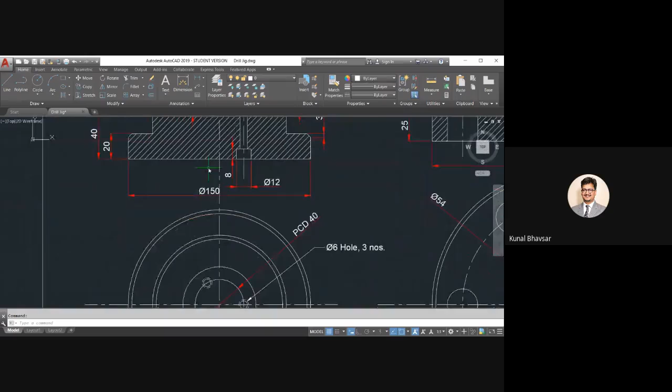Also, in order to hold the stem into its own position, so that it doesn't rotate about its axis, we have these three holes of dia 6. And obviously it has a cap of dia 12 by 8 thickness - that particular dia 12 is the bore which is provided for the hole, so that the screw head can go inside directly.

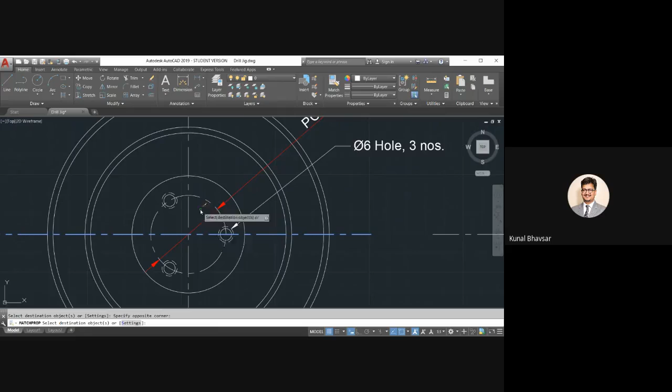So yeah, three holes are provided which are 120-degree apart, and it is at what you can see, PCD of diameter 40 here, which is lying on the diameter 40.

So yeah. Next is the stem. So on this base plate comes the stem, and the stem sets on the base plate, and you can see the MS1 number. Again these are dia 6 holes, 3 number, PCD 40 same, so it is matching there.

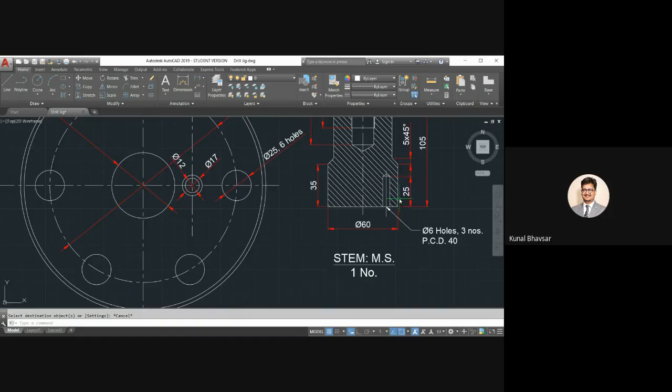Okay, from here to there these holes are going to match. So when you see from top in the section view, you actually can see only this one, whereas the other two are not on the same plane. So hence that is why we have not shown here.

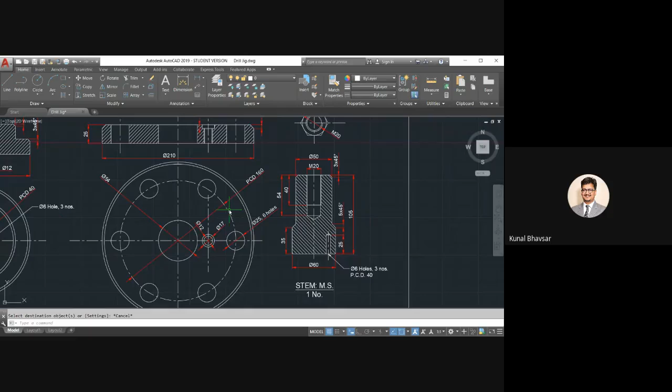Okay, similarly it will be there, the orientation of this stem. So the stem will actually support the whole jig plate and the component. Basically your component which is to be drilled will be sandwiched between the base plate and the jig plate - so this is the jig plate. And then the component also requires support, so this stem will provide that support.

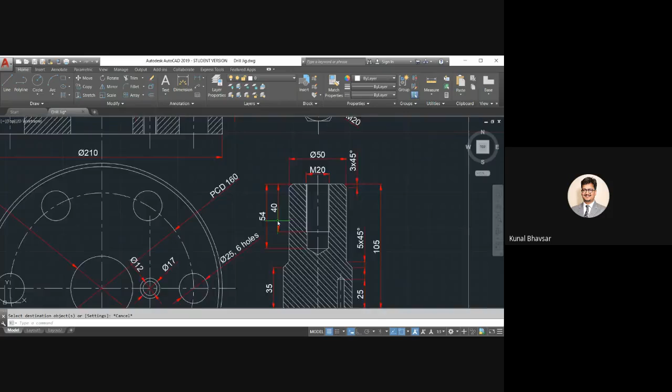Apart from that, the stem also has a drilled hole of M20. The drilled threaded length is 40, whereas the drilled hole size is 54 - we have kept it longer. So yeah, when the stem goes in, then goes the jig plate, and the jig plate has a sub-assembly of a small bush here.

If you see a small bush - it's alloy steel, 6 numbers of this bush, this is called a jig bush also. Obviously these bushes are required so that whatever your drill bit is there, whenever it's passing through this hole, they are the guidance or guidelines for the drill bits.

And if at all there is any wear and tear, the wear and tear will happen for the bush and not for the jig plate, which will save time and money in the production. So yeah, the bush goes inside, six numbers of the bush are there. So you can see six numbers of dia 25 holes are there, and you can see the OD of the bush is dia 25.

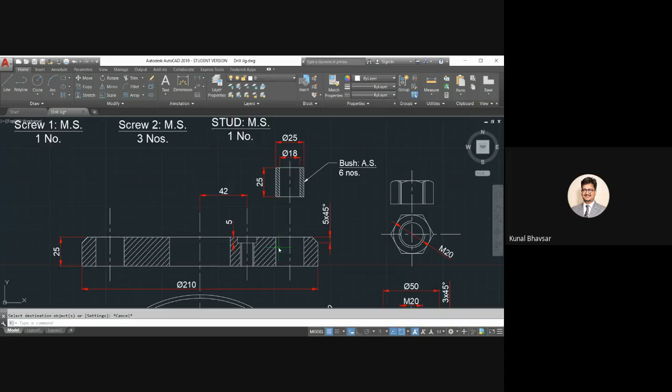ID is dia 18. We will see what goes inside this bush later - basically it is the drill bit that goes inside the bush. The bush will assemble here in the jig plate, you can see 25, 25. So from both the sides, the faces should flush with each other. Apart from that, the jig plate also has one counter bore and a threaded hole, basically with a counter bore.

So threaded hole of diameter M12 and has a bore of dia 17 of 5 thickness.

Now what is this 5 thickness for? This thickness is for the 18 - this total screw will actually go first inside the latch washer, that is 13 mm thickness plus 5 mm. So this screw will come here and set, and this is also M12, this is also M12 hole. In between this screw and this jig plate comes the latch washer.

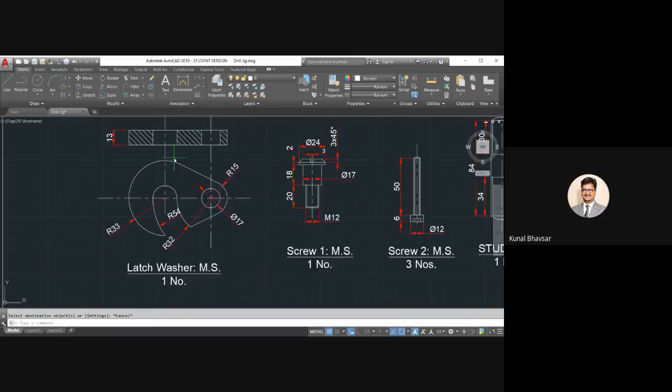Now this latch washer is a special type of washer, which is distinguished from our plain washer, which is round.

Basically, when we have very frequent opening of this in a jig, once it is all drilled, we have to open the jig plate, remove the component, then again put the component, put the jig plate, tighten it, and then drill all the six holes - that is the operation.

In order to do this, every time we have to remove the nut, and after the nut we have to remove the washer also, which sits below the nut. So if the washer gets lost, if you misplace it when you remove the nut and washer, that will be a loss of time.

So in order to save time here, what we have done is we have used a latch washer. A latch washer is basically a locked washer - you can see it's just like a latch. It is hinged at this hole here.

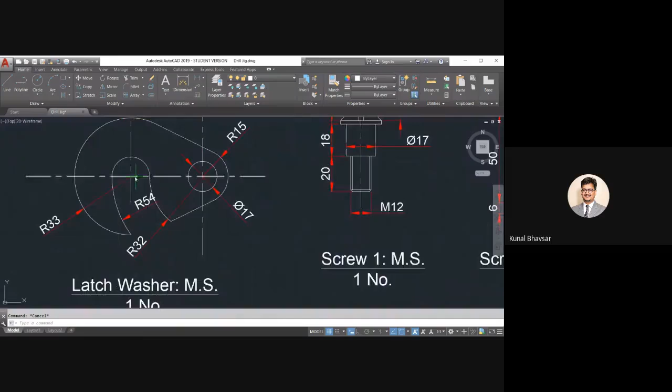You can see dia 17 hole. It will be hinged at this particular screw of dia 17 here, and hence it will lock this dia - this is a dia 22 slot. A dia 22 slot will actually lock with the dia 20 slot of the stud.

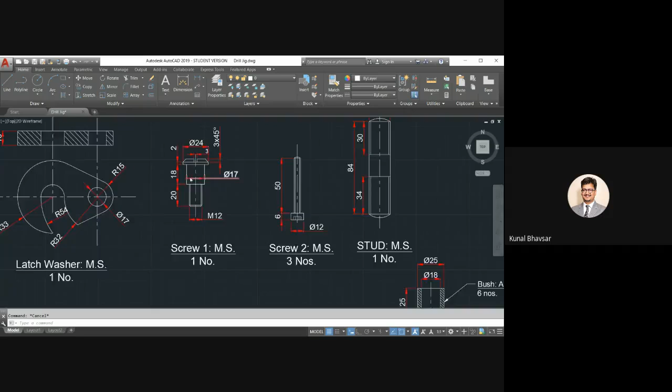We will see the 3D view also, but let us understand all the parts first. We have a screw, screw 1 - that's 1 number - then screw 2, 3 numbers. So obviously the 1 number which is required here goes in the jig plate and the latch washer.

The 3 screws which are required here are of dia 12 and 6 mm thickness, with a 50 mm length - this goes inside here. So 25 mm here, and you have almost 40 mm here, that much - 40 minus 5 is 35, plus 10 mm. We have kept the clearance here because this is 50 mm.

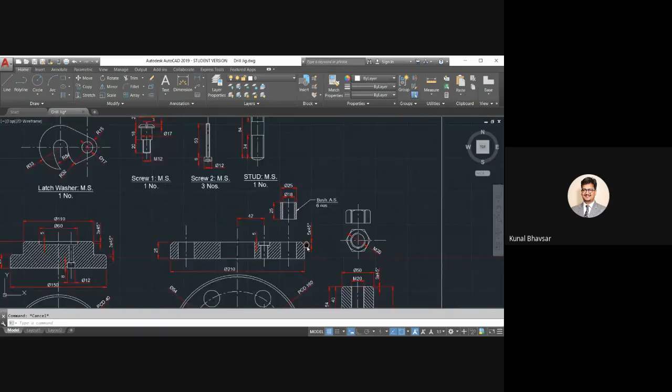After this, you can see a stud of M20, basically diameter 20 nominal, and from one end it is threaded at 30, and from the other end it is threaded at 34. So obviously the 34 end will go inside the jig plate and the other things here, and through the jig plate it will also go inside the stem.

And then from top, the latch washer and the nut will come, and it will tighten it up. So this is the details which are given here. We will come to the drawing, assembling these parts later.

Drawing of these parts is very simple. I will go through some of the difficult parts which are there later. But before that, we will see the 3D view which is created, and that will give you a clear picture of this particular assembly.

So if you can see here, the complete view of this assembly is given. So this is the base plate, and this is the jig plate here.

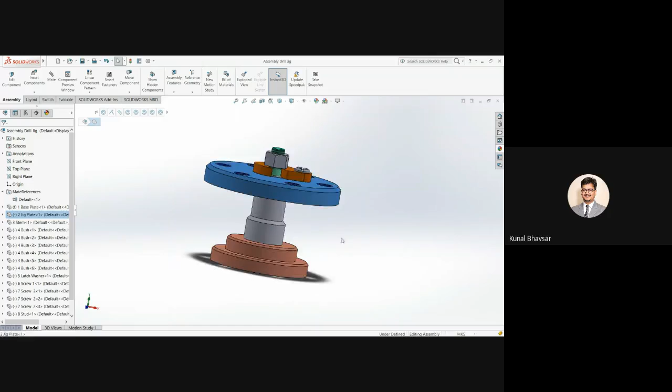So in between this base plate and the jig plate, your stem height is so adjusted that it matches the component height. The component which is to have six number of drills in between here - it will have that much same amount of height, so it will be sandwiched. The component will be there, and you will not be able to see the stem.

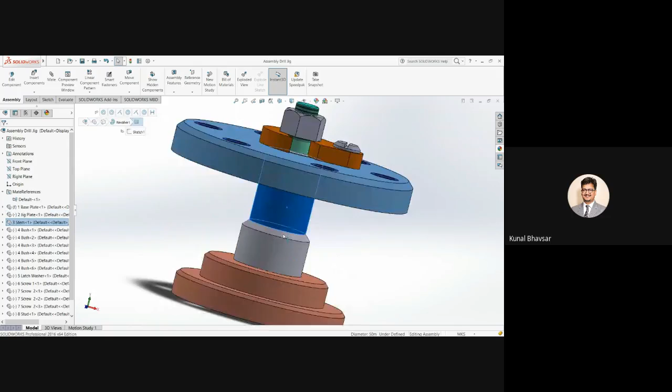There will be a component in between the jig plate and the base plate. This is the stem, and this is the latch washer which we already talked about. This is the nut going on the top of it, and this stud running through the stem, the latch washer, and the nut. We will see the section view of this.

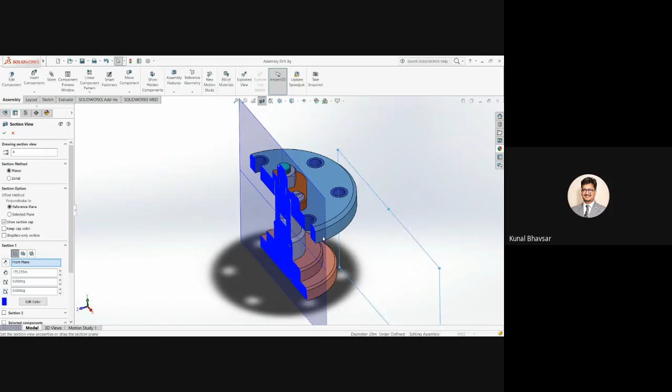We'll see the section view. So in the section view, what we are doing is, you can see here the small jig bushes which are already placed inside the jig plate. They are a different part.

Whenever the jig plate is asked to be drawn, the jig plate only has a dia 25 hole, that's it. This jig bush is separately installed in the jig plate. So you can see the base plate here.

The stem and the base plate have a threaded part here, so it is fixed with respect to this screw. Then we have a stud going inside this stem hole of M20, and the latch washer comes in, and then the nut is tightened from the top to tighten the assembly. This screw is a special hinge screw, basically utilized for hinging this particular latch washer.

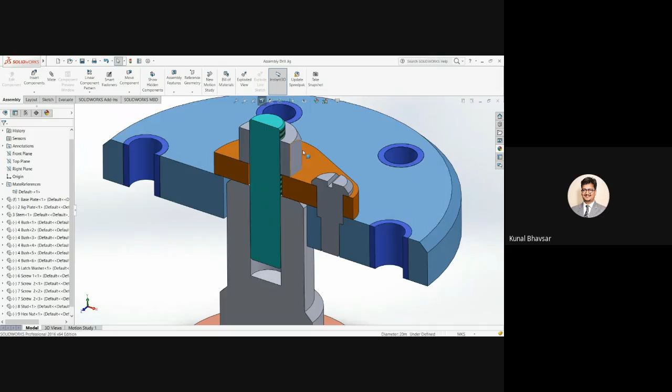So whenever you want to open this assembly, what we'll do is open the nut, and then we can just pull this latch washer from here to here, that's it. We don't need to open this screw every time. We can completely remove this jig plate, remove this stud, and remove the component easily.

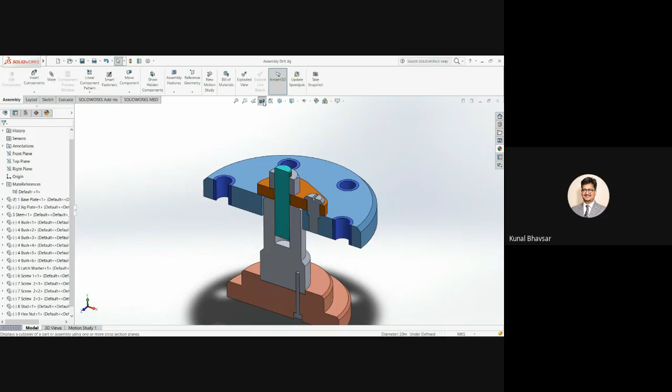Let us see if we can give some exploded view of this and show that.

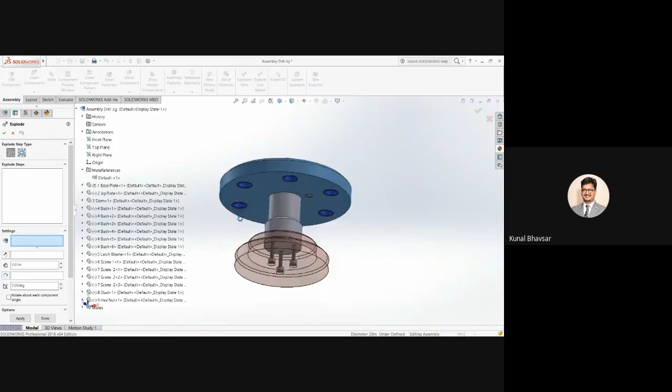Before that, I will also show you the base plate. I can show you that in the base plate, I am just changing the transparency, and there are three holes, and three screws at the base, which is tightened to the stem. So even for the stem, if I change the transparency, you can see here.

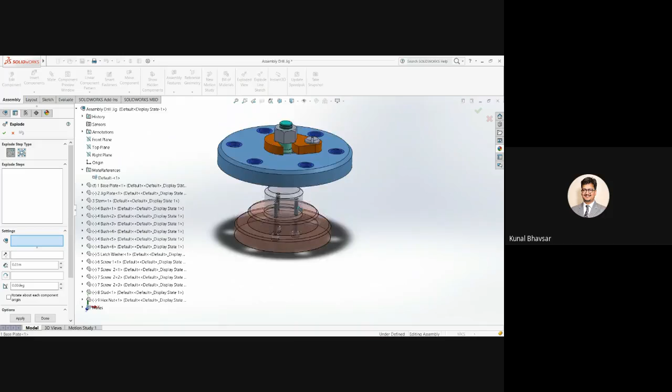Changing back the transparency now. Let the transparency be there. We can still remove this. So I will remove the nut.

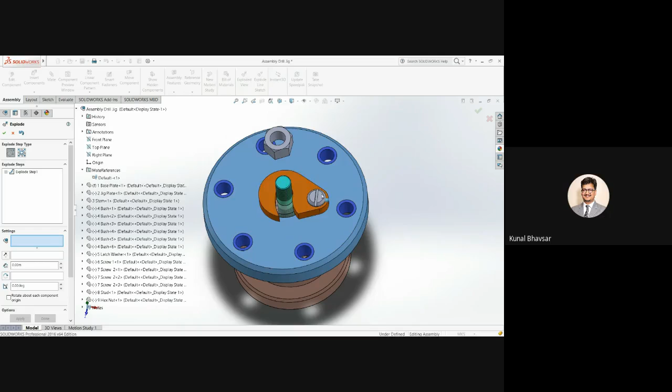Then I should remove, and the latch washer should actually be rotated. You can see here, not like this. Delete this step. Actually, this latch washer should be hinged here.

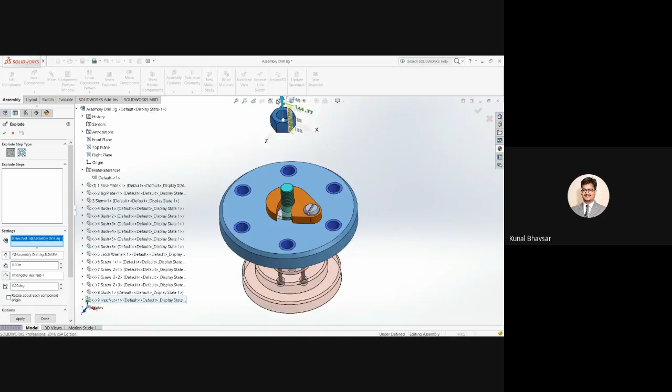No problem, let me just see this exploded view. Basically, this comes out here, and then we have this latch washer going out, hinged at this particular screw here, and then the whole jig plate comes out.

And the jig plate comes out. Actually it comes out with the washer itself. So let me change that step again. So it is this one, two, four, five, six, seven.

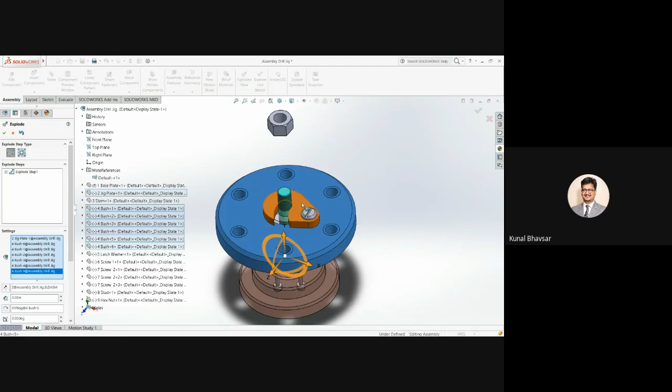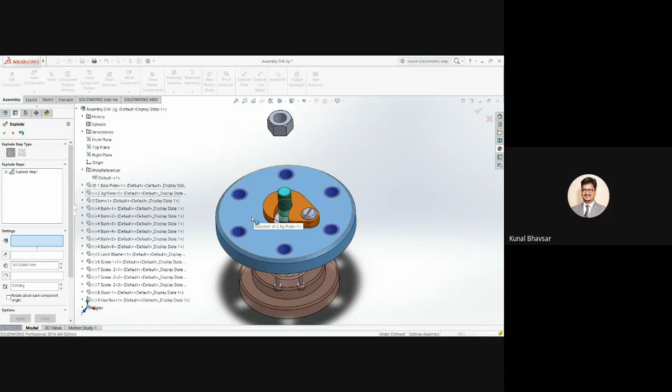So this includes actually. Let me do that again: one, two, four, five, six, seven, eight.

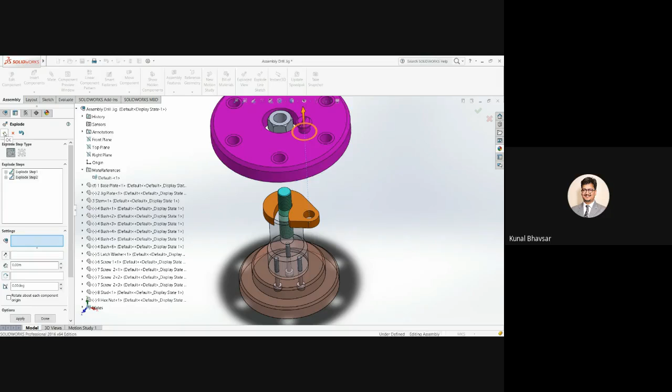So this actually just goes outside and it comes with the jig plate itself, and then comes out, and your component will come out easily, and then this goes again inside.

Now again we will go back to our drawing, and we will make the assembly drawing of the drill jig. This will also give us a clear picture of how this particular drill jig has to be assembled. First of all, making these parts, I think it's not very complicated.

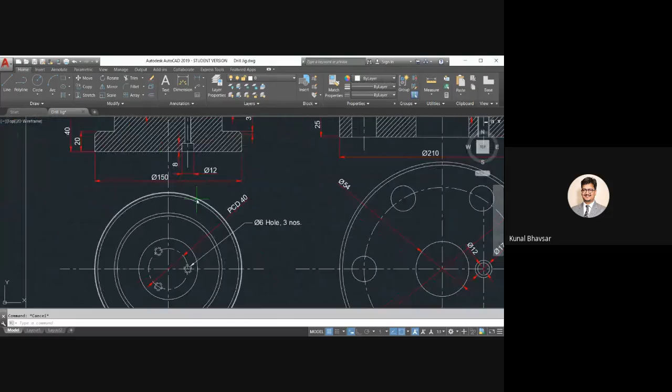It's very simple. These dimensions you can clearly see: 3 by 45, 3 by 45. These are the chamfers which I've used. There's a 5 by 45 also in certain parts. These are actually the two lines of the chamfer only. Again here, okay.

So let's copy everything so that I don't... from these parts, I will make the drawing. So basically, given is the detail.

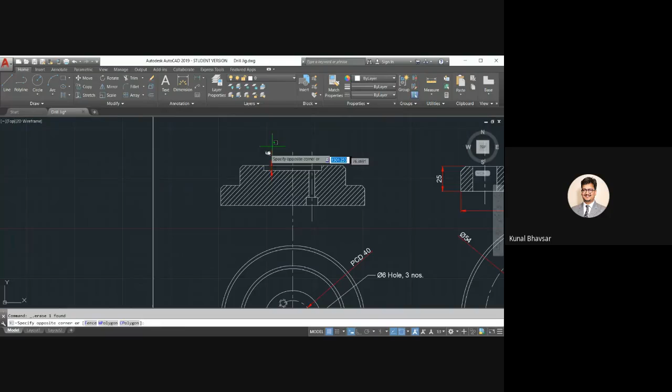The question will be: given is the details of the drill jig, and what you have to draw is basically a sectional front view of the assembly of the drill jig. Sectional front view of the assembly of the drill jig. Okay, first of all,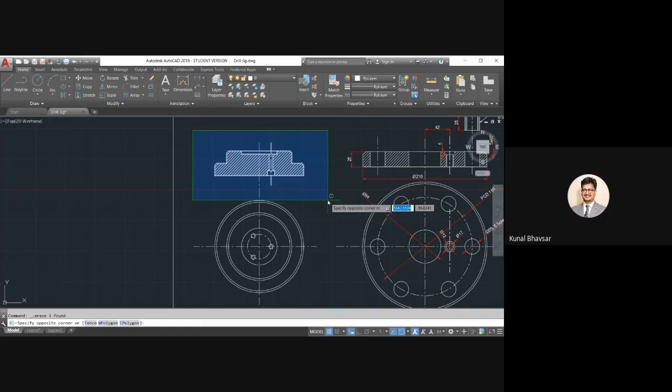we will start with the sectional front view of this. Sectional front view and top view. I will show the top view also. So first we'll start with this. So again, copy at a separate location so that I can make it.

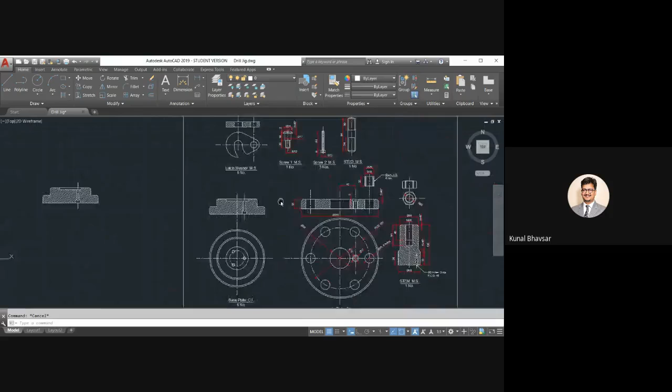Then on this, as we saw, we needed a stem to come in. So I will take the stem from here.

Okay, I'll just delete all the dimensions which I don't need right now, and then I can recreate them. So stem, obviously I will copy it from this base point here at the center point, and I will leave it at this point here.

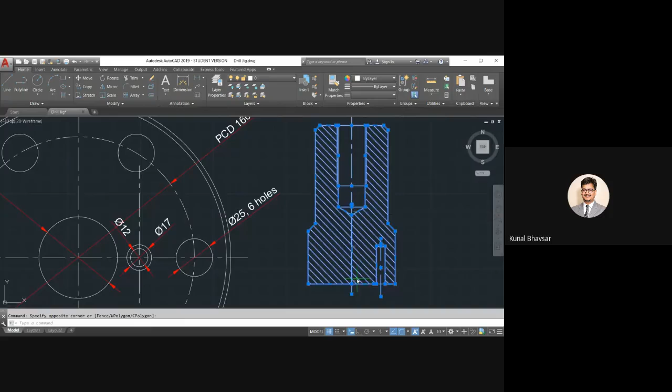Okay, I forgot to actually copy this, so we can take that. And now we can place the stem. Take this and you can place it here.

Okay, so obviously when the stem comes in, this line here is going to terminate up to this only. Since it was mirrored, these are two separate lines, and it's okay here. Now, yeah, this line is basically continuing. But here this line, this central line here, it is at the base point of both.

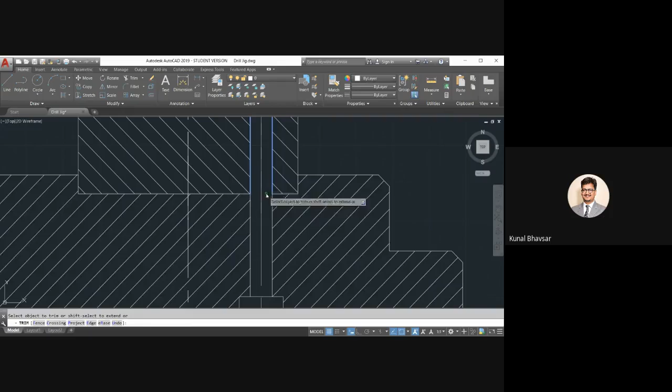Okay, I have created this space here so that this screw is going to come in. So I can put the screw here. Please be very careful that this screw is upside down, right? Okay, and screw is upside down here.

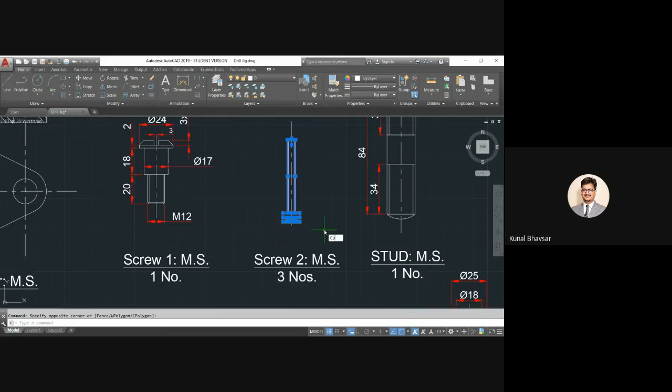Copy this. I will copy the screw actually from here. Okay, and place it here. Okay, if you can see this.

Okay, clearly done. This is a threaded screw. And the hole, because the thickness of the bore is 8 mm, whereas the thickness of the head of the screw is 6 mm. So obviously we have to keep this clearance in any of the part.

Okay, next thing that is going to come here, the other two screws are not going to fall in this particular plane, but if it is given that complete front view you have to draw, then you have to mark that circle, and then center, and then copy that particular screw. One screw only you have to copy, because the other screw will be exactly behind this. So one screw you can copy and keep there if it is full front view.

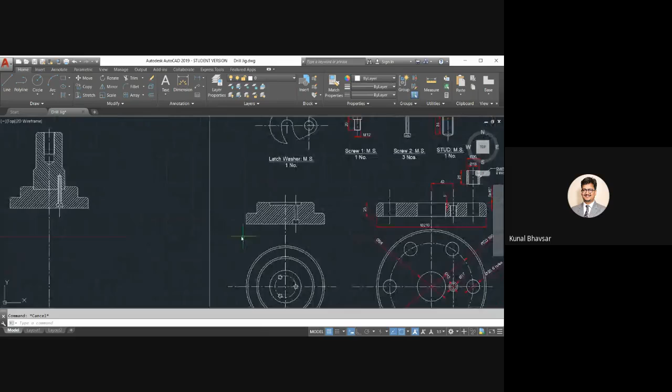Okay, now here it is sectional front view, so let's assemble the other parts. So here now we will put the jig plate. Okay, we'll put the jig plate.

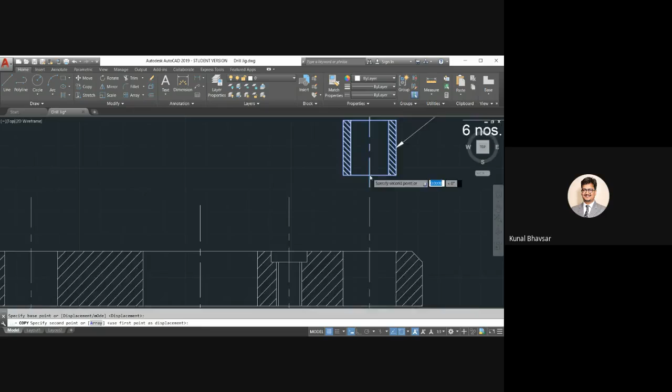In this jig plate, first we have to also put the bush. I will put the bush inside. Okay, I'll copy this from here to here, and I will also copy this side.

On this plane you can see, if this is the cutting plane, the two holes are there, so you can show the two bushes. Okay, and this two bush will go.

Copy this part completely, and what I'll do is I will have to take from the top. Okay, from the top of the jig plate, and put this on the top of this particular ear. Okay, top of the stem.

Okay, why? Because the latch is going to come into picture. Okay, so exactly this much height is the height of the component which is going to be there in between the base plate and the jig plate.

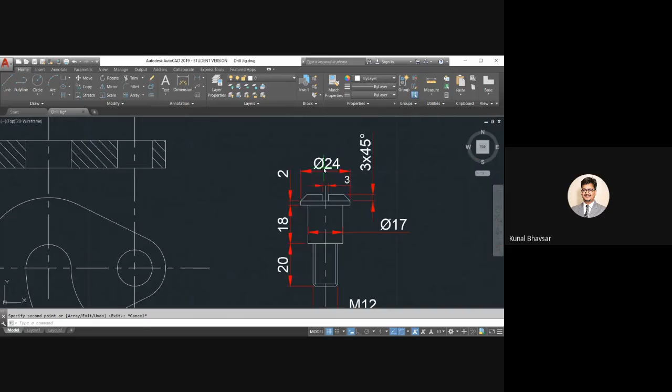Okay, now next you have to have the screw here. Okay, you get the screw here. Copy. Obviously I will copy it from here. Okay, sorry, not this.

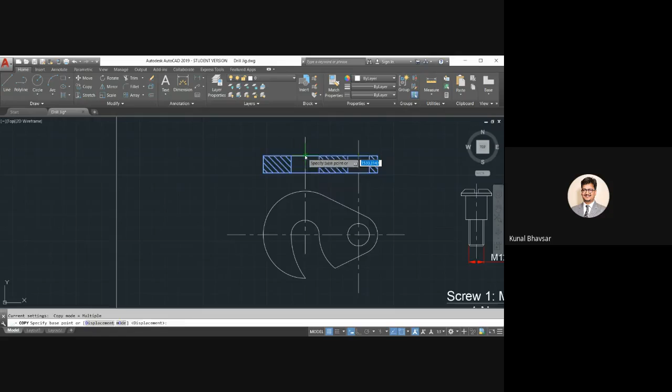Okay, before screw I need to put a latch washer, and you can take from either this or this. So if I am taking from here, I have to put it properly at this position here. Okay, but I have to take the bottom edge. So copy it from here and give it here.

Okay, so you can see this will completely align here. And once this is aligned, there will be a screw that is going to come in. So hence, this edge is going to get trimmed out. Okay, now you can put the screw in.

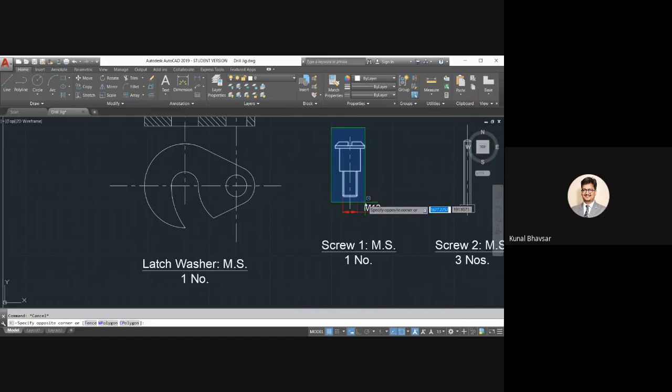So where are you going to put that screw in? Okay, only this much portion, only this head is going to be there outside the latch washer. Rest everything goes inside. Okay, so you can see here, take this and leave it here. Okay, got it?

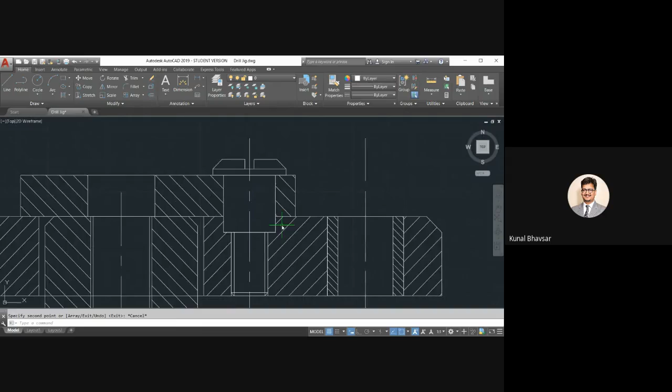Okay, so again we are not hatching the screws, we are not hatching the studs also, we will not hatch this particular long screw also. Okay, so obviously the stud is going to come in between, and hence we are not going to, here to here. Okay, completely these edges are going to get trimmed out.

Okay, if you see this also, basically that will be overlapped by, the line will also be overlapped, and also this you can maintain if you require it.

Now we will take the stud, and what we are going to do is take the stud here, copy this stud. Okay, I know that this stud will be aligned, but how much inside this stud has to go, that is the question mark.

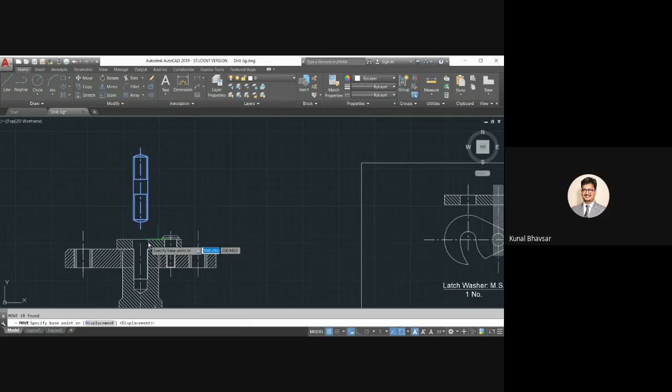Okay, how much inside this stud has to go. Okay, so once I get this aligned, move it, I will control it from here, and I will straight away move this here. Okay, nothing is going to go beyond this because this is obviously 20 thickness, right?

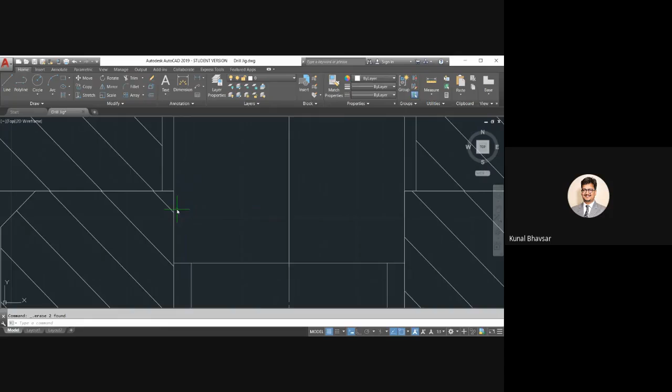So again, as I told you, these edges are going to get deleted because the stud is going to come in between. Next, we have to delete this also, and trim this line. This is the square neck only that is going to be visible.

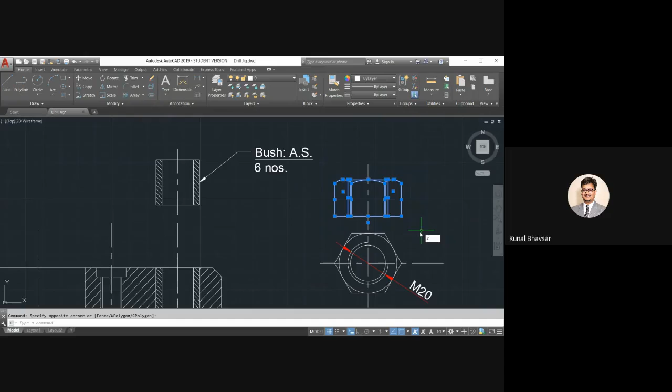Next we have to put the nut. This is an M20 nut, you can replace the size here with any existing nut, and the nut will come and sit here. There will be no gap between the latch washer and the nut because we are going to tighten it up. If you want, from here to here you can either delete the threading or keep the threading as well.

Here you go. And once the nut comes, that is also going to overlap the neck region of the stud. So this is the complete assembly, the complete front view of the assembly.

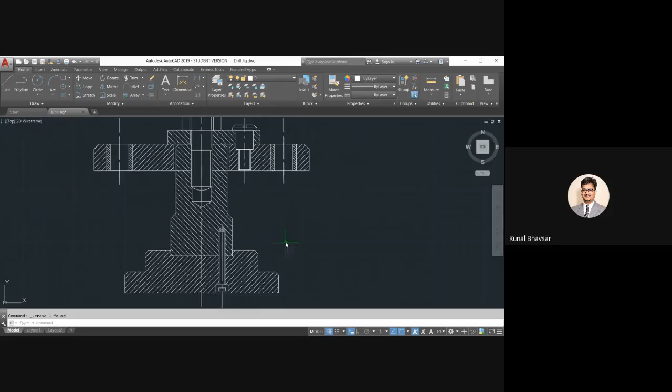If you want, you can give different colors for different hatching. You can see they are all staggered, so if this is 0 degree, this is 90 degree, and if this is 90 degree, then this should be 0 degree. Again, when I say this should be trimmed, once you make the hatch you will be able to know where the lines need to be trimmed properly.

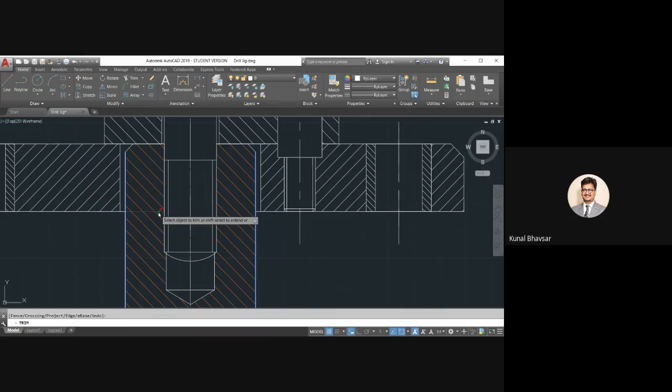Now you can see here, none of the lines are there, no problem, and you can change the color. You can retain this bush as it is. Now this latch washer is also a latch washer, you can hatch it into a separate color.

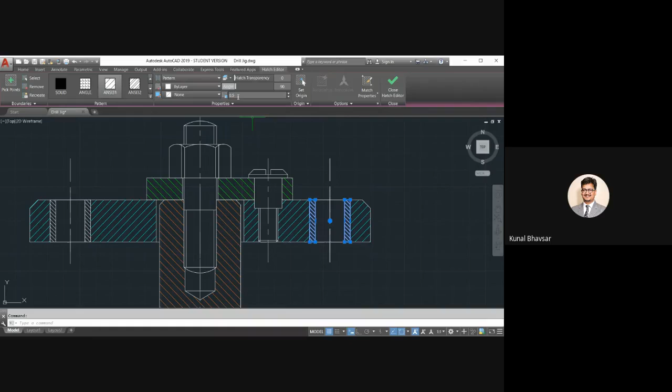Because here if this is 90, then this is 0, then again you need to have something different here. I've just reduced the size and changed the angle, reduced the scaling here, you can see 0.5.

So this is your complete sectional front view of the drill jig. If you want to make the top view, it's very simple, just have to copy this first base plate. We will go from the top first, so we have to make the circle.

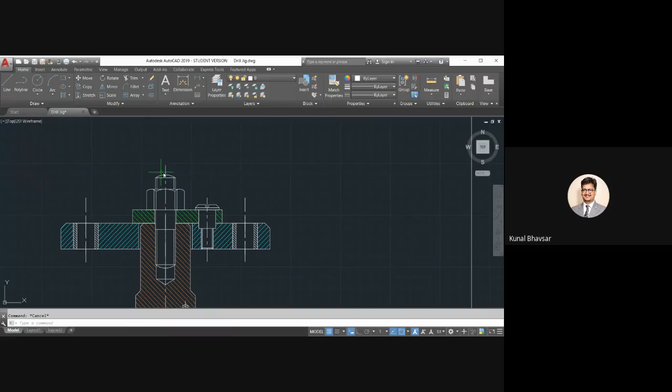First we will make the circle of dia 20, and we also have to make one more circle of dia 18, that is the threaded portion of the stud.

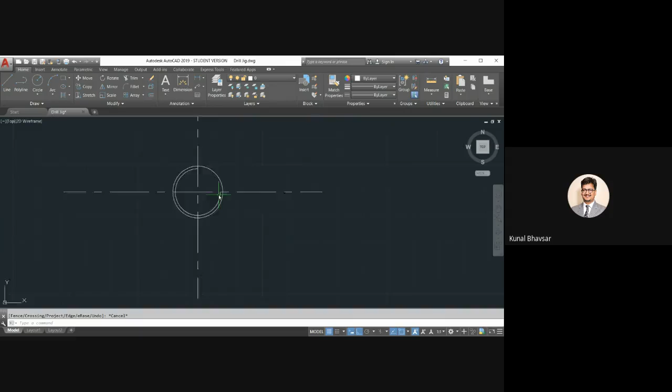Once that is done, we can make the external thread, and then inside that we can give a nut. After this, copy this here for the top view, and you can copy this here itself.

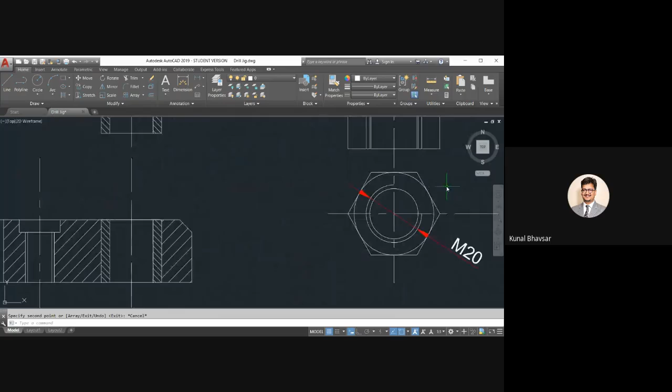Next we can see the latch next, the latch washer. So we'll just copy this, this is the center, we'll leave the center here.

Now this much edge, what you can see, this edge here from here to here will get broken, and we can extend this later. This much edge you can make hidden. Again break here to here, and we can make this hidden here.

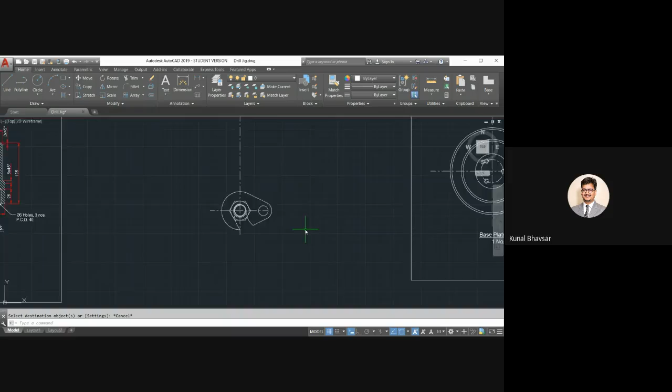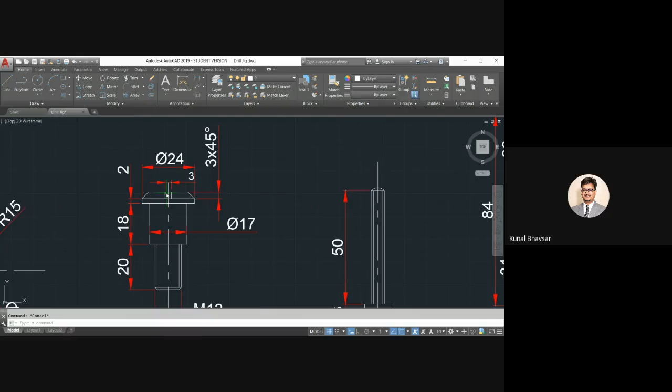After this, what you can see is this screw also. The screw is basically, you can see, a circle only. Here the top view is not given, but you can make a top view here. So the head size is dia 24, and the chamfer is 3 mm. If you see dia 24, and after this there is a chamfer of 3 by 45, so the interior circle will be -6, that is 18.

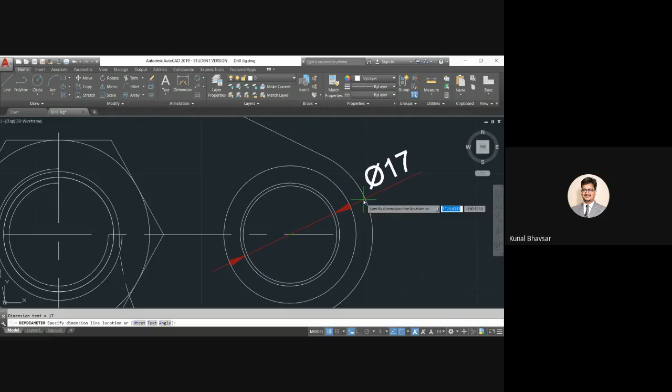Basically this 17 would then be hidden, because from top you can actually see 18 and 24 first, and then the 17 will come. And in between you can see the slot is perpendicular to the plane.

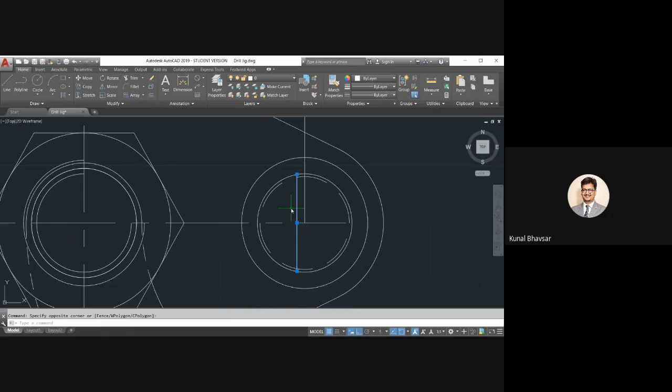So here it will be a 3 mm slot, offset 1.5. The slot is from this to this. A similar slot, mirror the other side. That's it, this is done.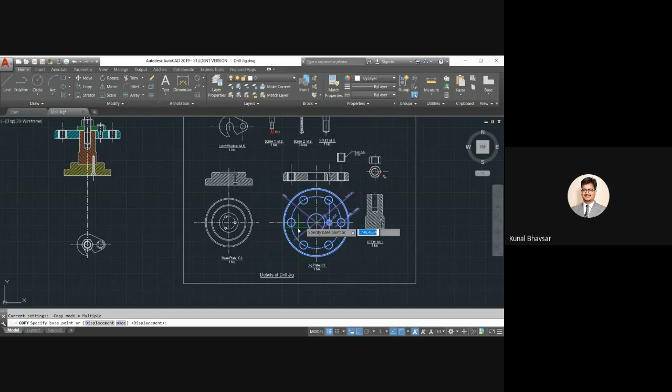Okay, now the screw is done. So after this we can install the jig plate. I will directly take this whole thing here from the jig plate, copy it, and install this at the center. Everything is about this center only, right? Completely taking the jig plate and installing here.

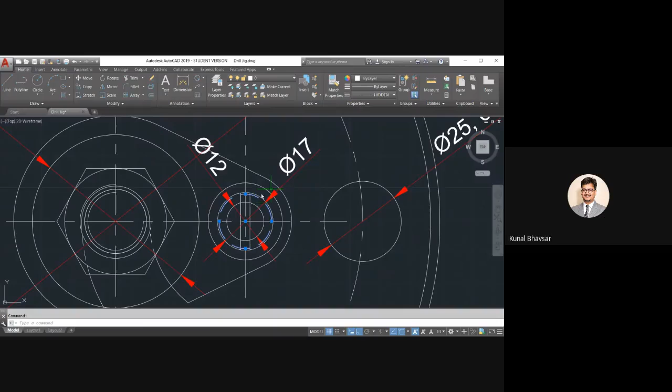Okay, now there was one diameter. So this diameter here, dia 54 actually, will become hidden. Because you can see here this is dia 54, which is below the latch washer. So hence you cannot see that material of latch washer coming in between. So what you can do is take this, and for dia 17 you can just delete that. It will be repeated, and after this dia 54 will become hidden.

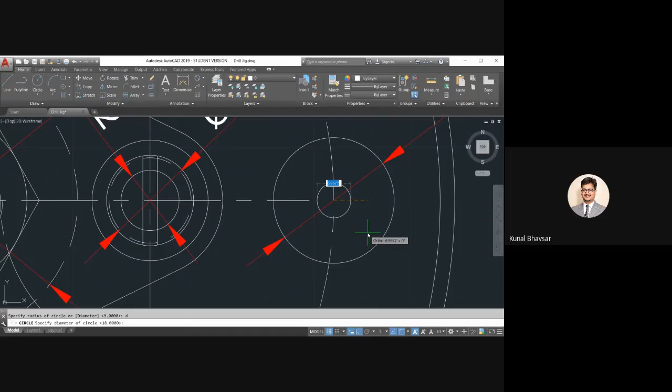Next, what you can do is install all the bushes. In order to do that, I just have to take one circle here and install one of the circle here. The interior diameter of the circle will be 18. So the bush is there.

Now what I'll do is, instead of this, I will say polar array. I will select this and say polar array, and this will be my center of the array. You can see the number of items are there, and they are equally spaced. All the bushes are now in the jig plate.

Next, I have to install the stem. There is also one more circle, you just have to put circles now. So the stem circle here you can see is the same circle. You don't have to put extra circle. The same circle is continued in the base plate.

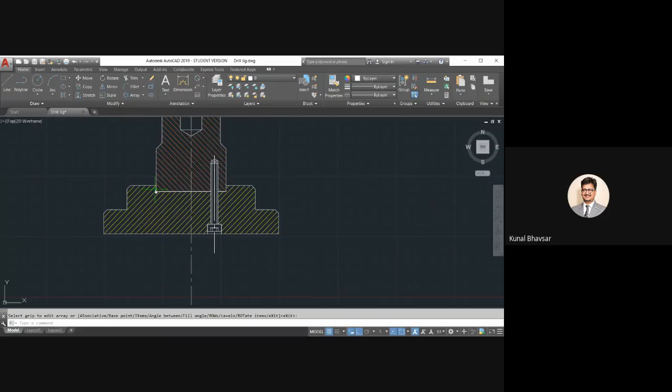So you can take this whole thing, because it is this circle only that is going to be hidden. Let's take this, copy. I'm just copying this at some other place first, and then I will change the whole scenario. I mean, it will change what you will see.

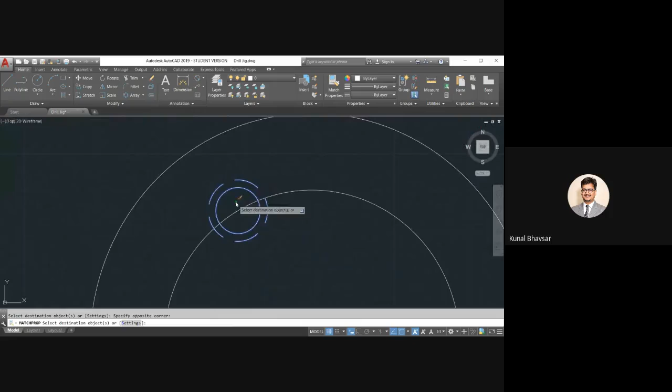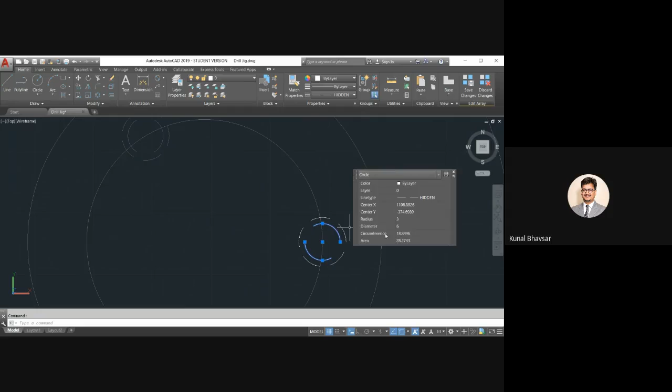I will change this to hidden. Change all of this to hidden actually. These are copied, so what you can do is edit source. From here, match properties, we are going to make it here. Not going to happen, hidden again. Once it is done, you see the changes.

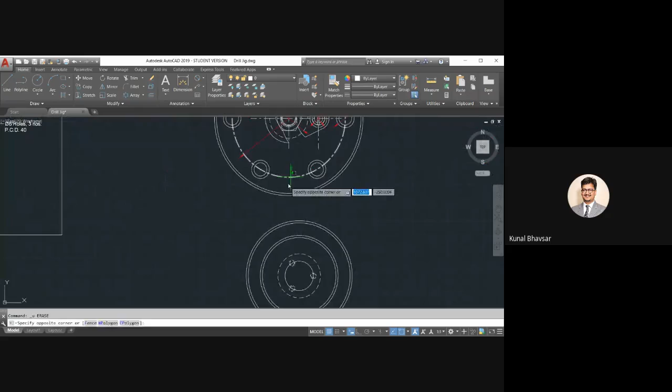Okay, so these are all hidden because at the bottom you will not be able to see. So once it is hidden, all will be hidden. Taking hidden line here, this line will be hidden. This line is anyhow a center line, which is already not there yet, but yeah, I can do match properties and make it center.

And this whole thing is actually covered below the jig plate. So if you see, all this here is going to get hidden. Everything, everything is going to get hidden. Not just this edge, but all these edges are going to get hidden. Everything on the base plate is going to get hidden. And these circles are basically also representing the diameter of the pin, so you don't have to overlap anything.

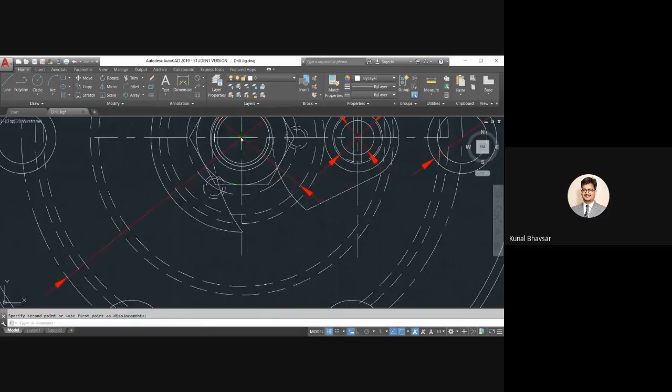Right now, what we'll do is just move this now properly and place it, and this is your top view, the top view is done. Okay, it looks messy, but because of the detailing you can figure out things which are proper.

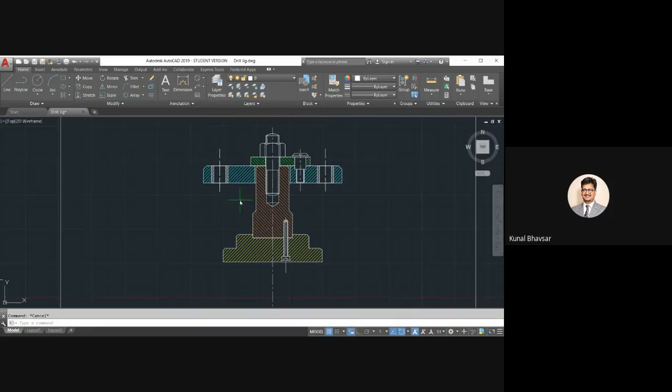Okay, so this is how you can achieve your assembly drawing. Not just assembly, there are other couple of drawings which I will send. So maybe the direct assembly is given and you have to identify the parts and draw the front view and the top view, or maybe sectional front view and the top view. That in that way also I can ask here. In the same module, I can ask both ways - I can ask assembly also and I can ask detail also. So we have to be ready with both of these things.

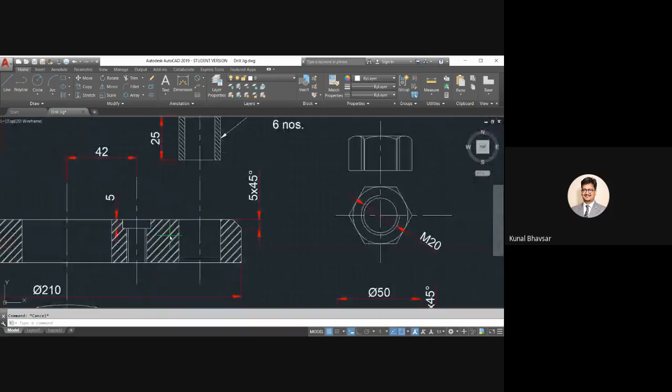Again, the main thing is whenever a detail of jig plate is asked, suppose you are given the assembly and detail of the jig plate is asked, in that case you have to show the jig plate without the bush. You can see here there is no bush inside. Jig plate doesn't have a bush inside. Bush is a separate part, which is alloy steel - it is a separate part. Jig plate is cast iron, again it is a separate part. So don't show that as the same one.

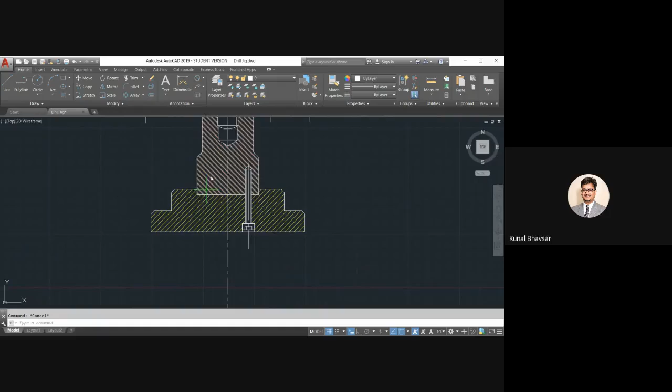Again, latch washer and the screw, they are separate parts. The screws and the base, this base plate and the stem, they are separate parts. So you have to identify these parts properly, and then you have to draw the assembly.